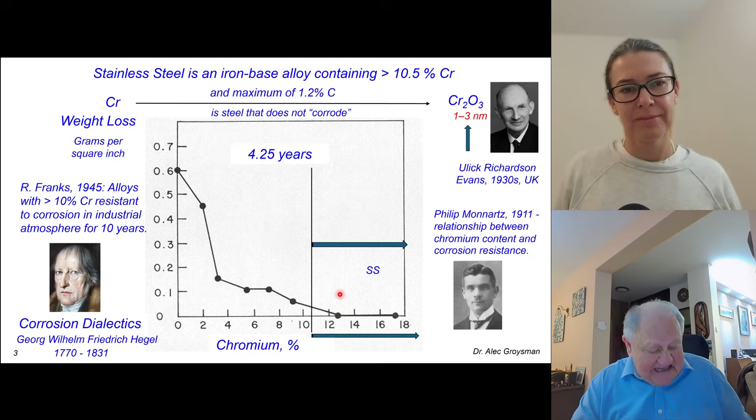During my career, I coped with many legends and myths about stainless steel. Even the discovery of stainless steel is shrouded in myth.

According to legend, stainless steel was discovered in 1913 by British metallurgist Harry Brearley when he noticed that some samples of an experimental alloy he was planning to throw away had not rusted after sitting on a shelf for several months. In fact, Brearley knew what he was doing.

It had been known since the 19th century that adding chromium to steel increased corrosion resistance, and a number of inventors around the world had already developed materials that would be considered stainless steel today before 1913.

A year before, in 1912, a famous American metallurgist, Elwood Haynes, inventor and automotive pioneer and entrepreneur who founded the Haynes Stellite Company in that same year, created the same martensitic stainless steel.

Brearley's main contribution was realizing that these steels could be used for table cutlery.

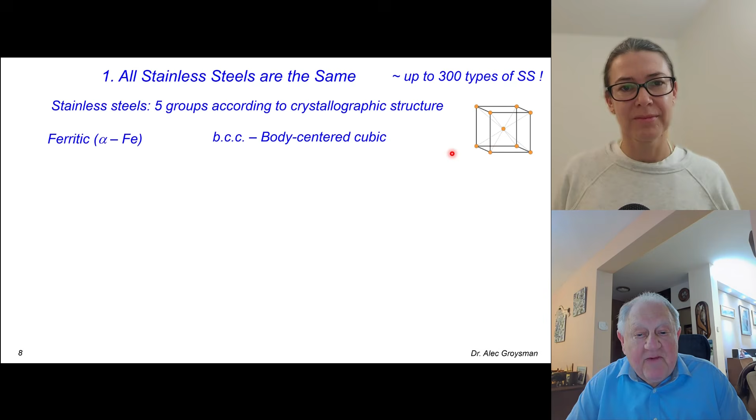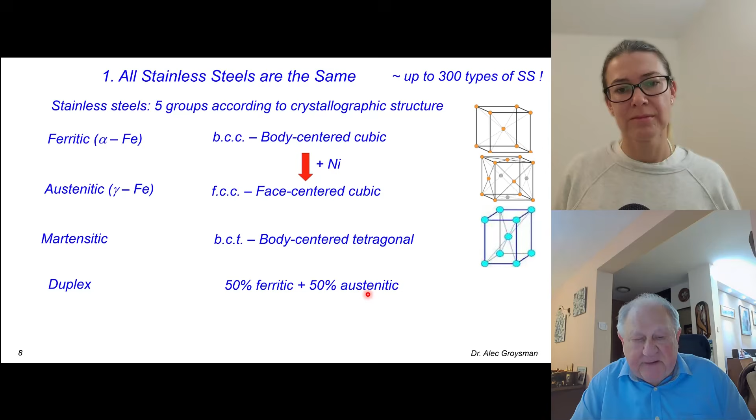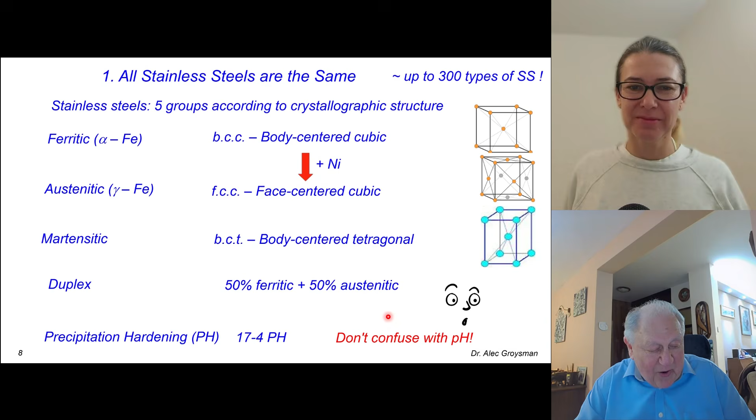When adding nickel, austenitic with face-centered cubic is formed. Martensitic is body-centered tetragonal. Duplex is 50% ferritic plus 50% austenitic. And precipitation hardening, PH — each type has its own properties. Don't confuse it with pH of aqueous solutions. When I explain this to chemical engineers, they are surprised that solid metallic solutions also have a pH.

Now the term stainless steel is responsible for another myth: the belief that stainless steel does not rust. We may identify 15 corrosion phenomena that can occur with stainless steel: general corrosion, pitting, crevice, galvanic, intergranular, stress corrosion cracking, erosion, and cavitation.

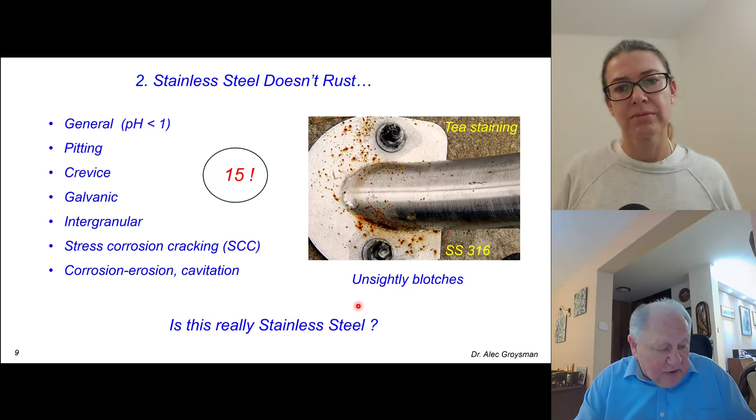Sometimes these stains are named tea staining, unsightly blotches — and we continue naming forms of stainless steel corrosion: sulfide stress corrosion cracking, corrosion fatigue, microbiologically influenced corrosion, hydrogen attack, high temperature corrosion or scaling, welding corrosion, galling, cold welding, and rouge.

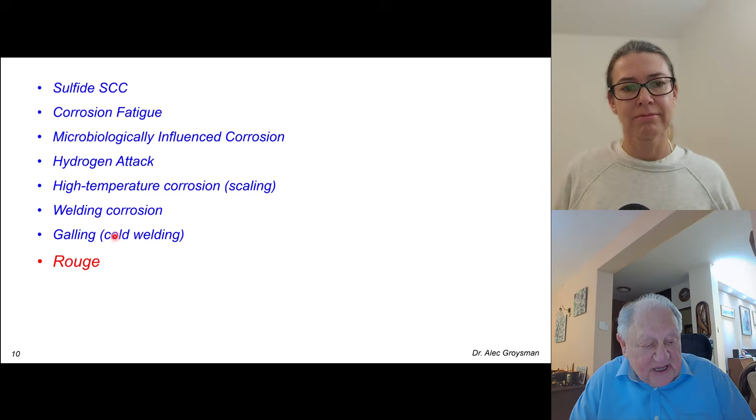Is this really stainless steel? This is rouge — I will talk a little bit more about rouge. Yes, this is also a corrosion phenomenon.

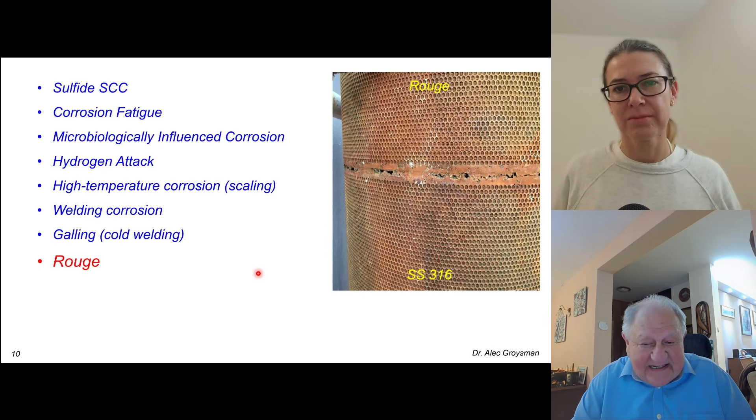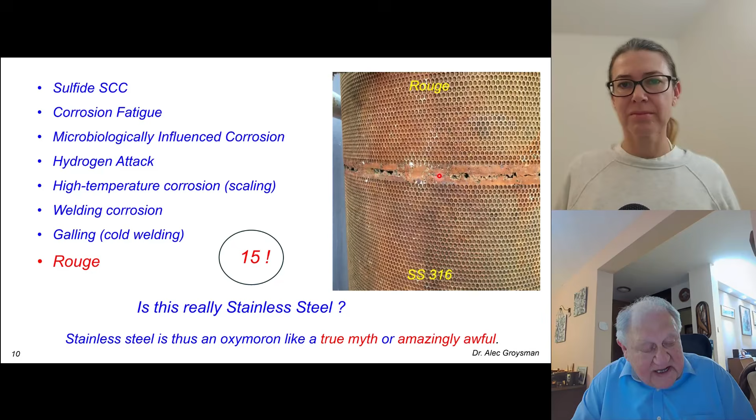Stainless steel is thus an oxymoron, like a true myth, or amazingly awful, in that it can stain, corrode, and rust under extreme atmospheric or contaminated environments. If people do not know under which conditions stainless steel is truly stainless, this can lead to catastrophic circumstances.

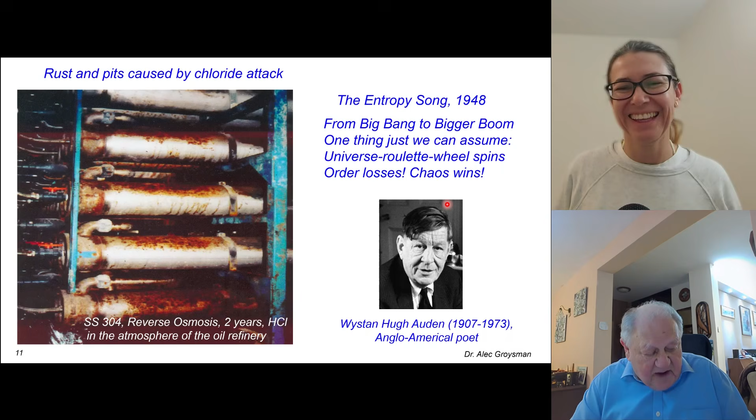The Anglo-American poet W.H. Auden wrote in 1948 a beautiful poem, The Entropy Song. I like it, and let me share with you only one verse: "From Big Bang to Bigger Boom, one thing just we can assume: universe roulette wheels spin, order loses, chaos wins." This is really what we obtain after corrosion of stainless steel.

Rouge is the commonly used term for the visible corrosion product of stainless steel. It can be composed of several forms of iron oxides, with red ferric oxide being the predominant form, but may also be orange, purple, blue, and black, Fe3O4. It can be due to iron contamination of the stainless steel surface, due to welding of non-stainless steel for support clamps or other temporary means, which, when welded off, leaves a low chromium area.

Rouging is a form of corrosion in stainless steel, namely a surface discoloration affecting stainless steel in pharmaceutical, food processing, semiconductor, and energy industries exposed to high purity water, clean steam, WFI (water for injection), and often cosmetic needs, requiring chemical cleaning and passivation.

I compare rouge formed on stainless steel with the Moulin Rouge in Paris — the Red Mill cabaret in Paris, beautifully depicted at the Moulin Rouge by painter Henri de Toulouse-Lautrec. So what does thermodynamics tell us about rouge?

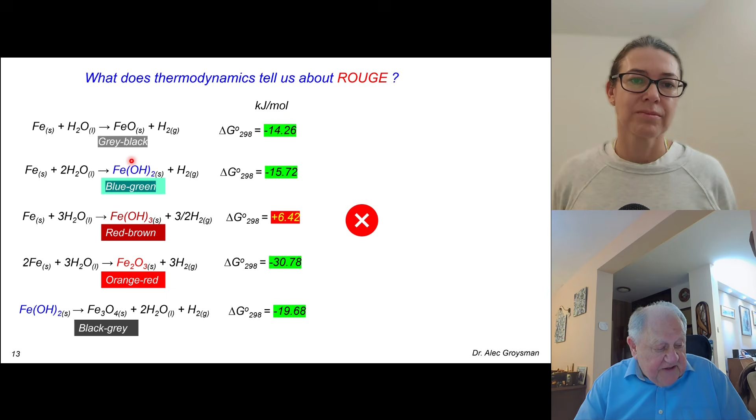Calculations of Gibbs energy for this reaction show that for these reactions, the energy is spontaneous because delta G is negative. But for this reaction, as you see, it is positive, therefore this reaction cannot occur. As you can see, different oxides and hydroxides are formed with different colors: gray black, blue green, orange red, and black gray, exactly as a parade of colors of rouge.

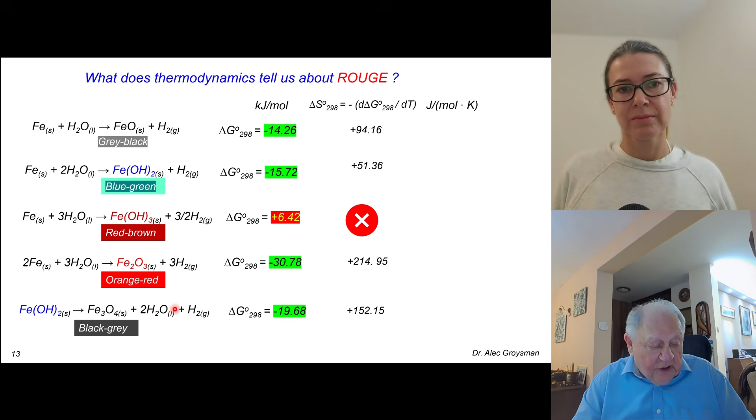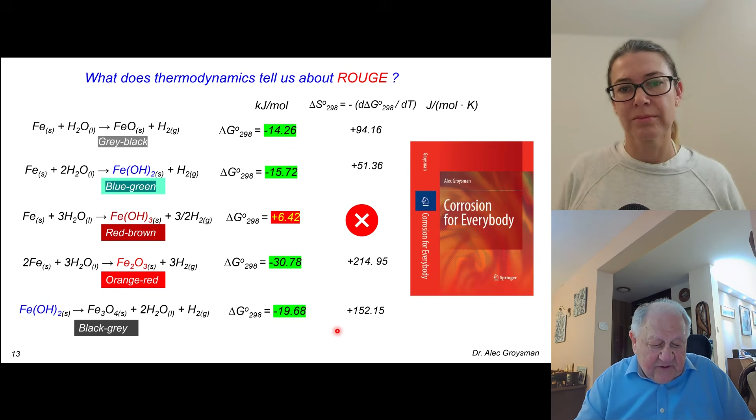We can go further and calculate the entropy change for each reaction. For all 4 reactions, we see the entropy change is positive. Entropy change is the differential minus the differential of delta G over dt, the temperature. This means that an increase of temperature results in an increase of tendency for this corrosion reaction, as delta G is lower with increase of temperature. Wonderful picture, correct? You may find all these calculations and reasoning in my first book, Corrosion for Everybody.

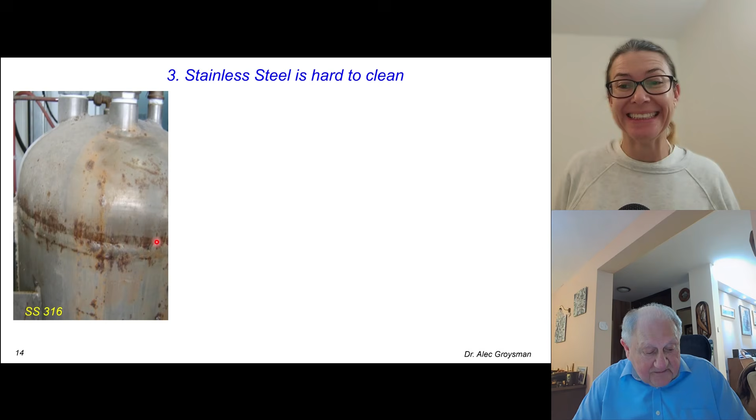Many times I heard people complain that their supplier has swindled them if a stainless pot shows signs of rusting. Once at my old refinery in Haifa, where I worked 22 years, engineers came and said they ordered the vessel from stainless steel 316. Please see what happened only after 2 weeks of its erection at the oil refinery. Certainly, I checked - it was stainless steel 316.

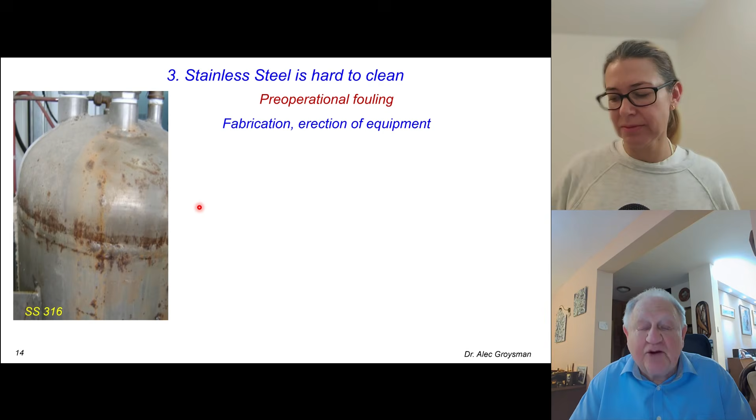What happened? Often, when stainless steel appears to be rusting, it has actually been contaminated with carbon steel particles, which rust, of course. The secret is to fabricate the stainless steel in a dedicated area and make sure there is no contamination with carbon steel from tools, equipment, and welding.

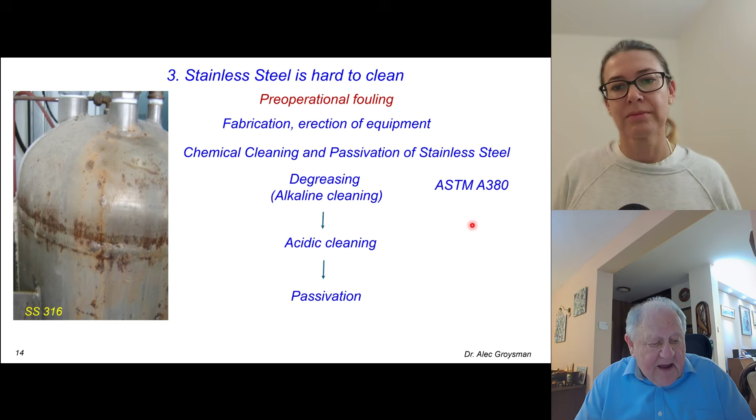If there is carbon steel contamination, treat the stainless steel with 3 consecutive steps: degreasing or alkaline cleaning, then acidic cleaning, and passivation, according to the wonderful ASTM standard A380. We should remember that the passive film from Cr2O3 is formed only on a clean stainless steel surface.

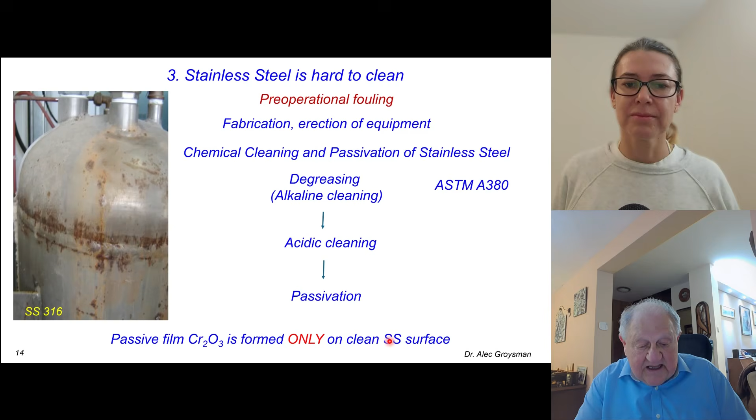In fact, stainless steel might be one of the easiest materials to clean. Never use abrasive scrubbing cloths such as Scotch-Brite pads, as this will scratch the surface of the material. Stainless steel is still stainless, widely considered to be one of the most hygienic materials to use because it's easy to clean and sterilize. It is often the top choice for use in commercial kitchens and medical facilities.

The next point: stainless steel is not magnetic. I remember well when I began working as a corrosion engineer at an oil refinery, and we had to examine the material of heat exchanger tubes. One mechanical engineer took a magnet for the examination. Do engineers correctly identify stainless steel, observing that the magnet is not attracted to the steel surface, and conclude that this steel is stainless because it's not magnetic?

But there are 5 types of stainless steels according to crystallographic structure: ferritic, martensitic, austenitic, duplex, and precipitation hardening (PH). Only austenitic stainless steel that has not been work hardened is non-magnetic, due to its nickel content. Austenitic stainless steels are used for non-magnetic applications, for example magnetic resonance imaging (MRI). Other types of stainless steel are magnetic. Therefore, the use of a magnet can only be applied to decide if the steel is austenitic, and cannot be used to define ferritic, martensitic, duplex, and PH stainless steels.

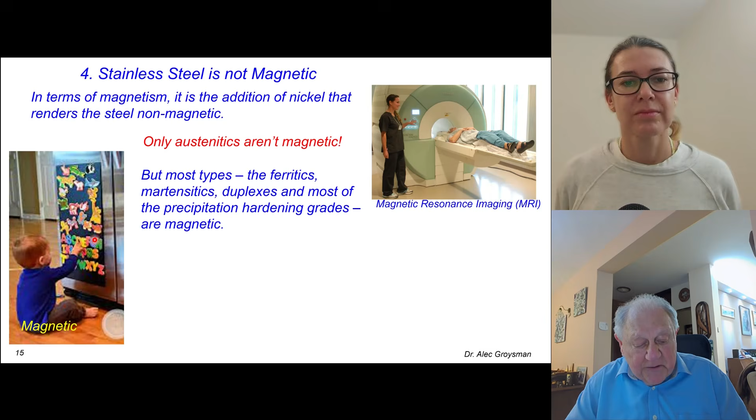Let me share my personal note. Austenitic stainless steel is a natural, unusual metastable condition. At room temperature, ferrite is stable. The addition of nickel and manganese makes austenitic steel stable at room temperature, but it can become magnetic when deformed. Cold work and welding are liable to increase the amount of martensite and ferrite respectively in this steel. After deformation, it becomes work-hardened steel.

Try putting a magnet in the corner of a stainless steel sink. Some magnetism can usually be detected.

Then, if you open old textbooks on corrosion from 40 or 50 years ago, you can read that stainless steel cannot be used in seawater. Really? At the beginning of the 1990s, one engineer at our oil refinery showed me a ball valve made from stainless steel 316, mounted in the firefighting line and containing Mediterranean seawater, that failed because of leakage. This ball valve served only 3 months. Pitting corrosion occurred, you see, exactly according to the textbook.

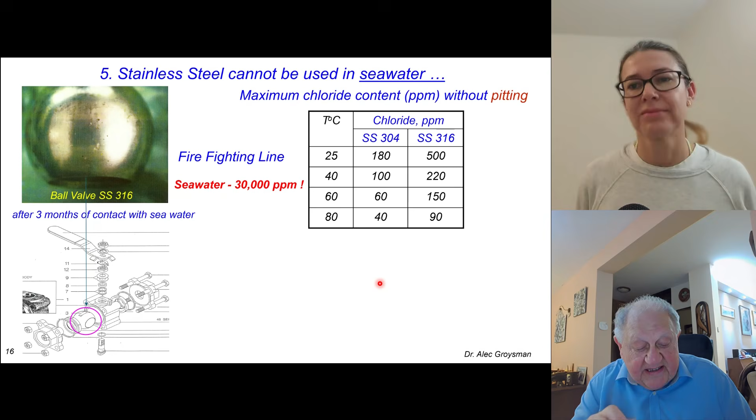Another engineer informed me that at his unit, stainless steel 317 tubes have been used for 5 years with cooling water of high salinity without problems. Then another engineer, who was a captain of a submarine, told me that submarines were made from stainless steel and used in seawater without any problems. I understood that stainless steel can be used in seawater only under conditions of movement, motion, circulation - that is, under constant moving of seawater.

Pumps, heat exchangers, pipes can be used in contact with moving seawater. During a stop, equipment should be drained and rinsed.

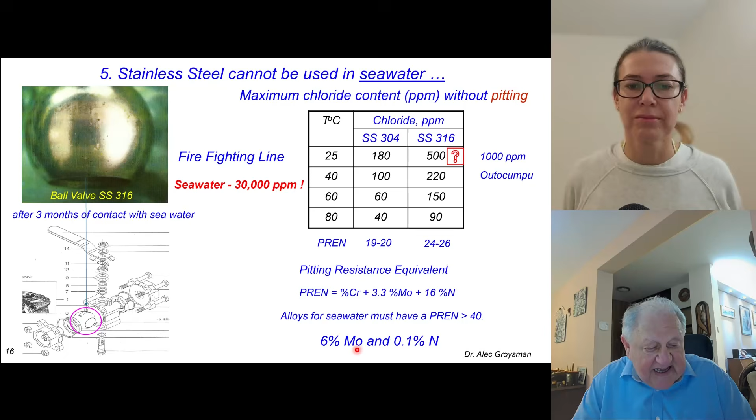About 50 years ago, the pitting resistance equivalent was introduced. Everyone can calculate this number, defined by the content of chromium, molybdenum, and nitrogen. Nowadays, stainless steel alloys for seawater must have, under stagnant conditions, a pitting resistance equivalent more than 40. Usually they have 6% molybdenum and 0.1% nitrogen.

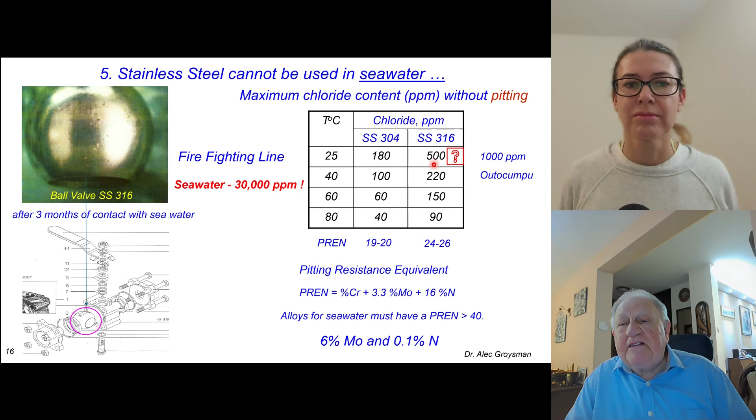I'd like to show you that in some books you may find critical chloride content maximum is 500 at 25 degrees centigrade. But Outokumpu, for example, in their catalog, you may find 1000 ppm. It is very problematic to find this maximum chloride content - you should check every time.

When I began working for oil refineries in 1990 in Israel, I often heard that stainless steel is expensive. Yes, stainless steel does cost more than carbon steel in dollars per ton, but carbon steel usually needs to be painted for corrosion protection. And even if their first install cost is lowest, the advantage disappears on the day they have to be repainted. The cost of stainless in dollars per day for the life of the job will be much lower.

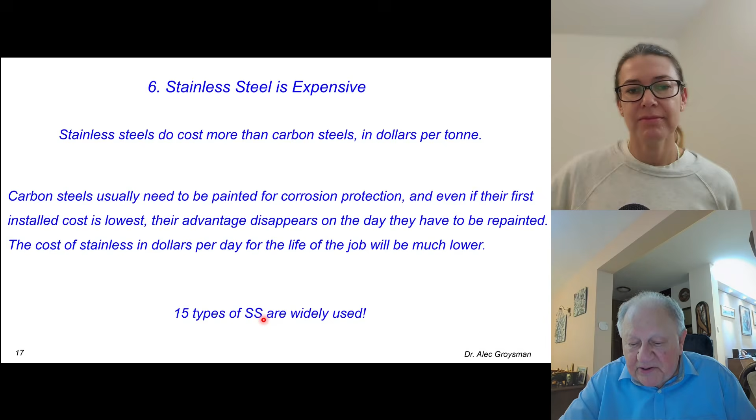Thus, today we use only 15 types of stainless steel which are widely used, not all 300 types. The next myth is that stainless steel is not recyclable.

Like other types of steel, stainless steel is recycled. It may be one of the most environmentally friendly alloys to produce. At the end of its life, as much as 92% of stainless steel can be reused in new stainless or carbon steel. On average, 60% of any stainless steel product comes from this recycled content.

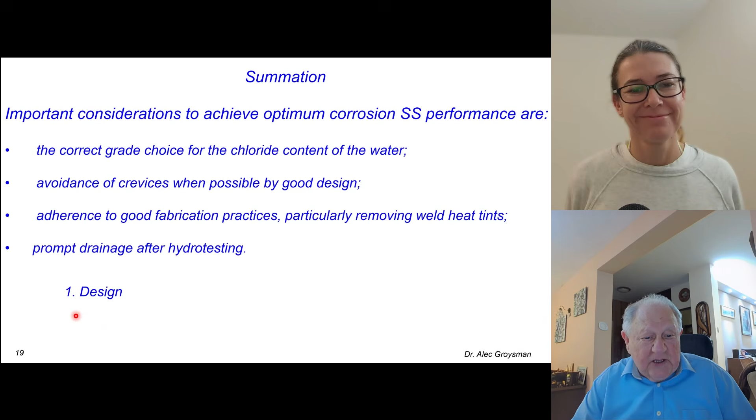Thus, this myth is debunked. And I'd like to sum up important considerations to achieve optimum stainless steel corrosion performance: the correct grade choice for the chloride content of the water, avoidance of crevices when possible, good design, adherence to good fabrication practices, particularly removing weld heat tints, and prompt drainage after hydro testing. And usually we shall do good design, good fabrication, and wonderful maintenance.

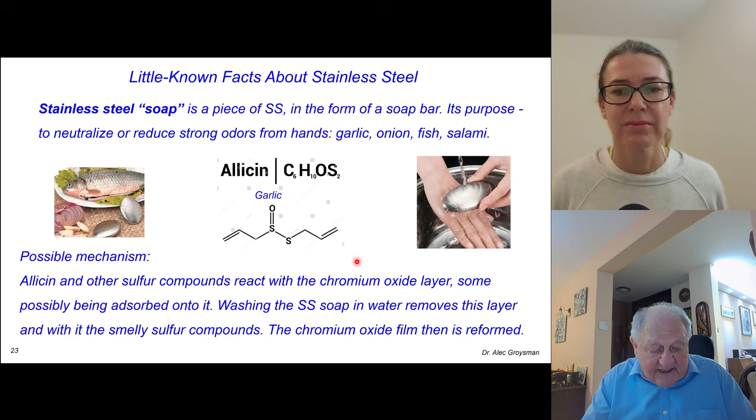And now my favorite topic: stainless steel in art. You may see statues each year, in each town, in each city, over the world, with beautiful art made from stainless steel material.

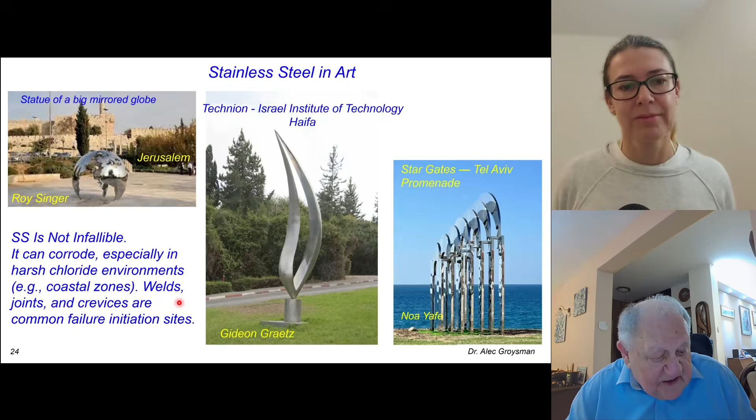Stainless steel is not infallible. It can corrode, especially in harsh chloride environments, for example coastal zones. Welds, joints, and crevices are common failure initiations. I can tell you that 2.5 years of zero maintenance and exposure to salt spray from the bay have taken their toll.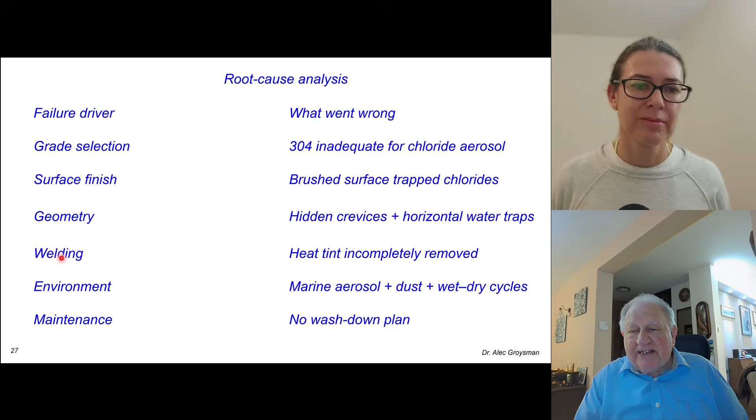And what are the root causes? Root causes, failure drivers - what went wrong? Grade selection: 304 is inadequate for chloride aerosol. Surface finish: brushed surface trapped chlorides. Geometry: hidden crevices plus horizontal water traps. Welding: heat tint incompletely removed. Environment: marine aerosol plus dust plus wet-dry cycles. And maintenance: no wash-down plan. It is very awful.

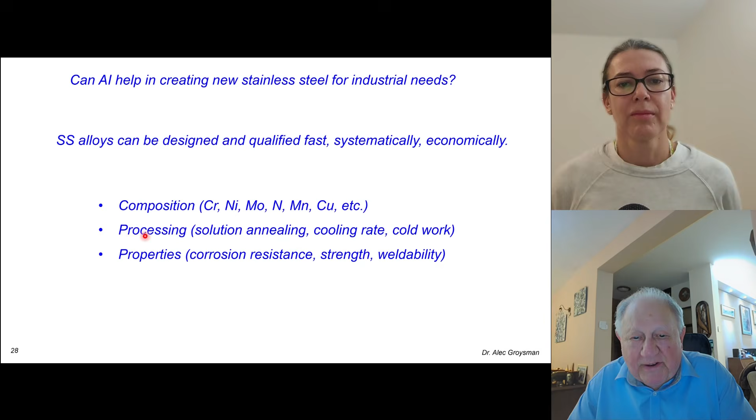And now I also want to talk about artificial intelligence. Can artificial intelligence help in creating new stainless steel for industrial needs? Yes. Stainless steel alloys can be designed and qualified fast, systematically, and economically. We know many examples now when artificial intelligence helped create new compositions - chromium, nickel, molybdenum, and nitrogen, manganese, copper, etc. - along with processing: solution annealing, cooling rate, cold work, and properties: corrosion resistance, strength, weldability.

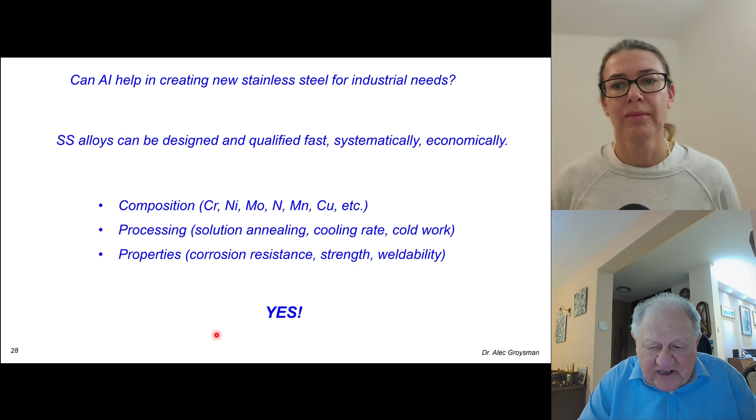Does artificial intelligence help create new steels according to our needs? Yes. Example applications of artificial intelligence in creating new stainless steel: predicting pitting resistance equivalent, designing low-nickel or nickel-free stainless steel with comparable corrosion resistance as was prepared, invented, and made in France - though I've just shown you, they did not use artificial intelligence. Also optimizing molybdenum and nitrogen trade-offs to avoid sigma phase formation.

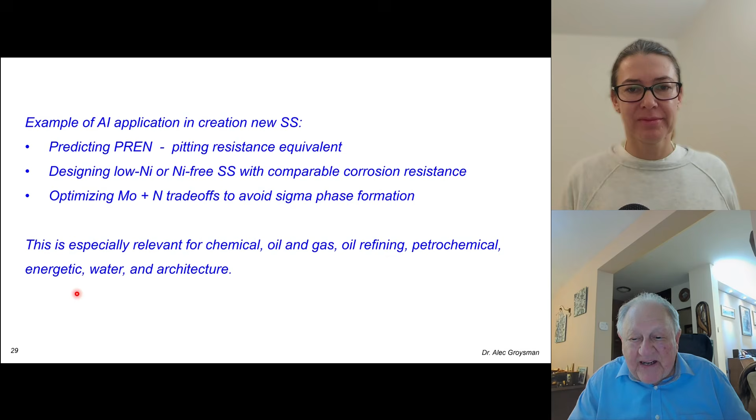This is especially relevant for chemical, oil and gas, oil refining, petrochemical, energy, water, and architecture applications. Artificial intelligence can predict pitting potential in chloride solutions, crevice corrosion risk, sensitization susceptibility, Rouge formation tendency, passive film instability, and stress corrosion cracking likelihood.

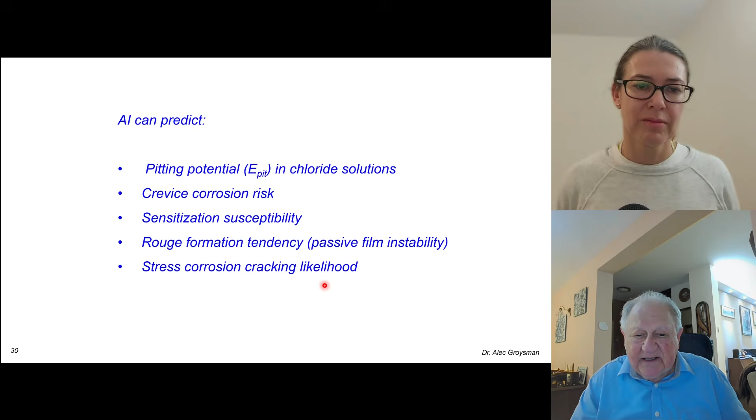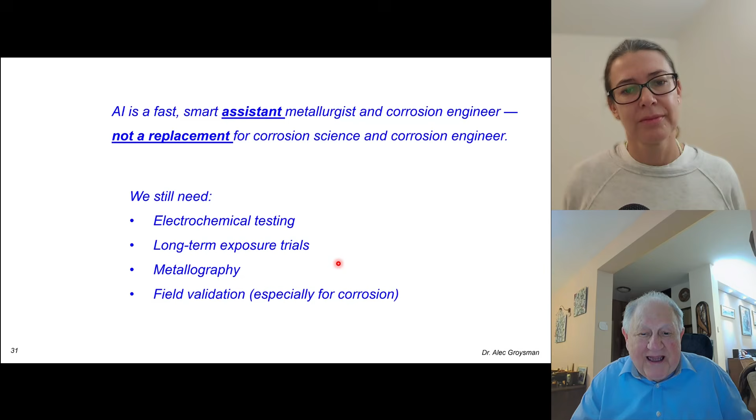Artificial intelligence is a fast, smart assistant. I emphasize assistant to the metallurgist and corrosion engineer, not a replacement. Not a replacement for corrosion science and corrosion engineers. We still need electrochemical testing, long-term exposure trials, metallography, and field validation, especially for corrosion.

Stainless steel is perfect for artificial intelligence because large big data exists, with well-defined property relationships and targets developed over more than 100 years. My conclusion: artificial intelligence can and already does help create new stainless steel, especially where corrosion resistance, cost optimization, and accelerated development are critical.

I like this fairy tale by Hans Christian Andersen, from Denmark. He wrote the Ugly Duckling story. 'Oh, how great the world is,' said the ducklings. The small ducklings were much more spacious than in a shell. 'Don't you think the whole world is here?' said the mother. 'What is there? It stretches far, far beyond the garden, beyond the field. But to tell the truth, I have never been there since my childhood.'

And I can say the world of stainless steel is also endless. Let me finish with the quote by Albert Einstein, which we began with 10, 20, 30 minutes ago: 'Learn from yesterday, live for today, hope for tomorrow.' It talks about life, hope, and learning. This quote has been a source of huge motivation for students, engineers, scientists, and I feel for all people around the world. I emphasize learning from the past and ensuring a better present, which will create hope for tomorrow.

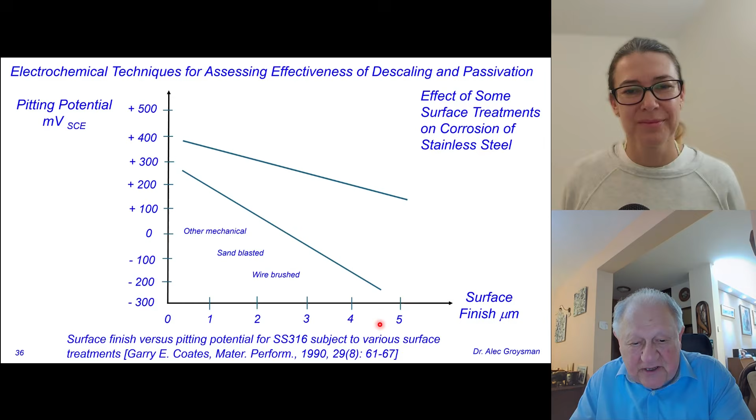Thank you, thank you, Monica. I'm finished, Alec. Thank you so much.